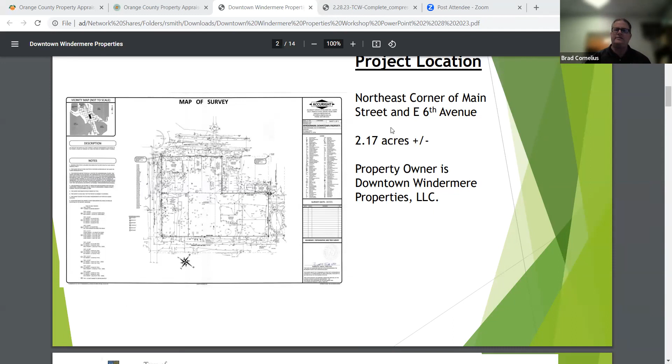Just a very quick reminder, everybody knows this is at the northeast corner of Main Street and 6th Avenue. It's about 2.17 acres, and the Downtown Windermere Properties LLC is the property owner. Next, please. So, just so everybody does remember, this is the downtown master plan, or the town center master plan that was adopted by the town several years ago, but it is still in effect. It's adopted in your comprehensive plan as well as within your land development code. And the blue circle there does show the area where this project is. And you see it is designated for development under this master plan, with the front portion along Main Street, the building zone, the rear portion along Oakdale, the parking area. So that is the master plan that guides this project moving forward. Next, please.

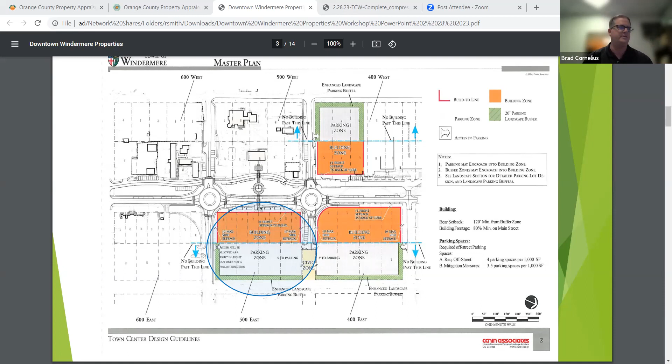So as you all may recall, at the end of the 3rd workshop, there was a request by town council for much more detailed information to be submitted for this request. Again, as a reminder, this is a workshop. We're not at the public hearings yet. So what was submitted in response to the town council's request by the applicant, CV3 and Kimley Horn, is what I have on the list and what was in your agenda packet. We have, I will call them the full civil engineering plans. They're not 100%, but they're very close to being fully completed. We have the drainage report. We have the potable water report. We have a geotechnical report.

We have an updated tree mitigation plan and a new arborist letter dated February 13th. We have more building renderings and elevations. We have a 3D rendering of the project. And then they didn't provide updated renderings of the Oakdale buffer wall or any of the buffers, the wall or the landscaping. They did submit the same rendering they had at the January workshop for the Oakdale buffer wall and landscape. So that did not change from what you saw. They did not submit though any other buffer renderings for this evening. Next, please.

So where we are right now in the process, outside of the workshops, I'll say, is because we do have the civil engineering full set submitted, we have begun what we'll call our first review on the technical side of the review. So that has begun.

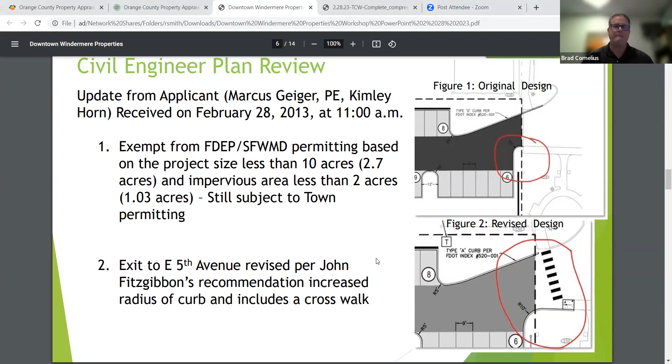So now I'm going to hit on some of the big topics and issues I know are out there about this project, just to make sure all the information needed to make a decision is clear to everyone. For this project, because it's in your town center district, which has its own set of parking regulations outside of the standard parking regulations adopted in your land development code, the set standard is 4 spaces per 1,000 gross square feet for all land use types. So there's not a differential between land use types. It's 4 spaces per 1,000 gross square feet.

So currently the proposed building is at 19,575 gross square feet, or the project is, and that would equate to 79 parking spaces based on that standard. There is a second provision in the land development code and in your town center standards that also provides the opportunity for the town council to consider reducing that requirement from 4 to 3.5 spaces per 1,000 gross square feet

for all land uses. And that determination that the Development Review Board and the town council would need to make is that this is appropriate based on the protection of existing mature trees on the site. So it's related to protection of the existing tree canopy. So with that calculation of 3.5 per 1,000, that then comes to 69 spaces under your codes.

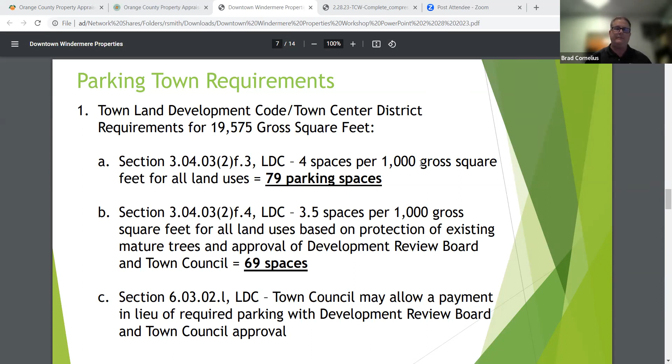What they're proposing, and this hasn't changed from what you saw last month, on their current site plan, they are proposing 69 parking spaces. So they do meet the requirement of 3.5 spaces per 1,000 square feet. So that is how they've established their parking, and that's what they're asking for the town council to approve.

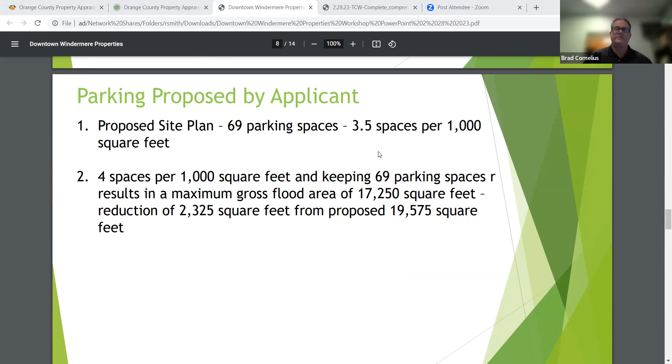Just as information, if the standard is maintained at 4 spaces per 1,000 square feet and keeping the existing 69 proposed parking spaces, that then results in a maximum allowed gross floor area, I apologize for those typos in there, of 17,250 square feet. So it's a reduction of about 2,300 square feet from where they are today. So if the 4 is maintained as a requirement and they maintain the 69, that would be the reduction required to be consistent with that standard. Next, please.

The next item I'm going to touch on, but I am going to leave this to the applicant to give a lot more detail to this. What's in your packet? You have that tree mitigation plan. You have an accounting of the trees being removed and being preserved on the site. And you also have a letter from the arborist, Eric Hoyer, that provides more information about the different tree items and topics that have come up over the last few months in these hearings. And I will not address those specifically because those are beyond my expertise, and allow the applicant and their arborist to address that.

But when I look at it and do the accounting, what it appears is that they are removing 25 native trees from the property. They are removing 27. Well, when I say property, it does include areas within the right-of-way that are impacted by the required right turn lane, or maybe in the area of the wall and the buffer area that they're putting. So there's 25 native being removed, 27 invasive, and then

of the trees remaining, 38 trees are remaining. Of that 38, 17 of them are actually within the boundaries of the project, so within the property lines. However, the other trees are around the perimeter of the property. But those are the trees that are remaining. And again, there's more information in the arborist letter, and I'll allow the arborists to address those concerns at their time. Next, please.

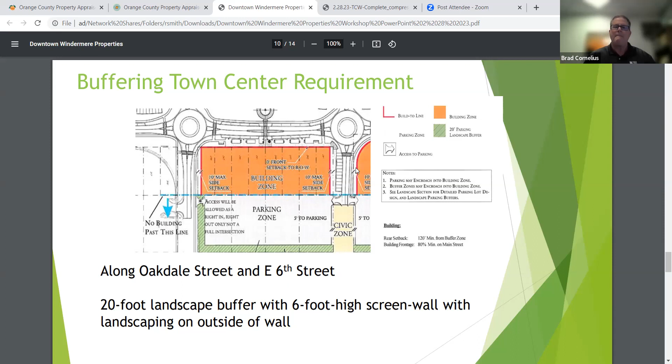This is their landscaping plan that you have with your agenda item, which does show the buffer area. They are providing the required 20-foot buffer, and that hasn't really been an issue with these last couple plans that we've had. So they do meet that requirement. They do show the 6-foot wall along Oakdale. However, these plans do still show a 3-foot wall on 6th Avenue.

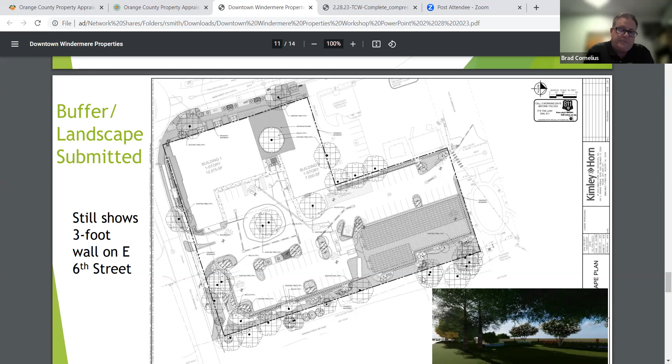As I stated just previously, your town center guidelines do require the 6-foot wall on East 6th Avenue, and speaking with residents on that side of Oakdale across from 6th, I do know they want that 6-foot wall to be maintained along 6th Avenue.

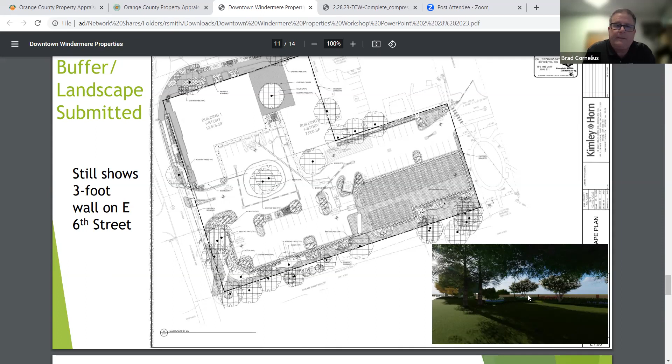So I did want to have that. The little image that's there at the corner that Robert was pointing to, that was the rendering that they submitted in their January public workshop for the view from Oakdale looking south into the property. And that's what they had provided. But we do have the plan, and actually in the full plan set, it does have a listing of all the different plant materials that would go into that buffer area. So that is the buffer. Next, please.

The other issue I wanted to touch on with everybody, which has been quite a bit of discussion, is the proximity of the building at the corner of Main and 6th to the roadway. Another point in your town center design requirements, it has what's called a build-to line, which is a different way to look at setbacks. And basically the build-to line says this is where you have to put the building. You have to build it to that line to bring it up to the sidewalk, to maintain that storefront along Main Street and maintain that atmosphere. So that's why this building is pushed where it is, to be consistent with that requirement of your master plan.

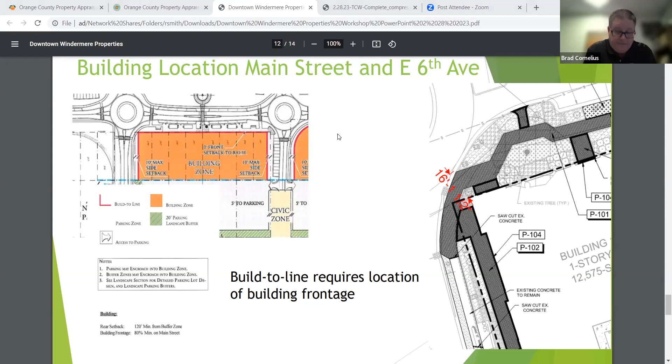I did look at the distance again, as we discussed at your last workshop, and when I measured it more closely this time, the corner of the building to what I would call the travel way, not the right of way, but the travel way of the roundabout that's in that proximity, would be about 16 feet, 16 and a half feet. So it's not right on top. Again, I'll let the applicant's engineer address site issues and things of that nature, but that is the location. I will say it is consistent though with the intent that you show in your master plan, and it's also consistent with a downtown atmosphere where you have low speed traffic and things like that. So that is some more information about the location of the building, just so that is out there for everybody's information. Next, please, Robert.

So those are the big items. So the next important part to explain, so again everybody understands the process, is we're at the 4th workshop. If, and I will say if, this is the last town council workshop, what would happen next? What would happen next is town staff would go through the full technical review of the 100% engineering plans for construction. So we would do the full technical review of the plans. And at the same time, this also requires the preparation of a development agreement. As y'all may recall, there's an agreement related to transportation mitigation, dealing with utilities, a few. So those agreements will also be drafted within that period.

Once the review is complete, once all the agreements are complete from the staff side, then public hearings will begin. And the first step will be the noticing of these public hearings. So this will be noticed when they're ready to go to the public hearings, to both the Development Review Board and the Town Council. The noticing will include letters to properties within 500 feet of the boundary of this project. There will be a sign posted on the property. The town, of course, will have it posted on the website, and there will also be a newspaper ad. So we will do our best to get as much notice out there. But as always, never hesitate to reach out to myself if you ever have a question about where this is in the process. And I'm more than happy to speak with anyone. So that would be the next step.

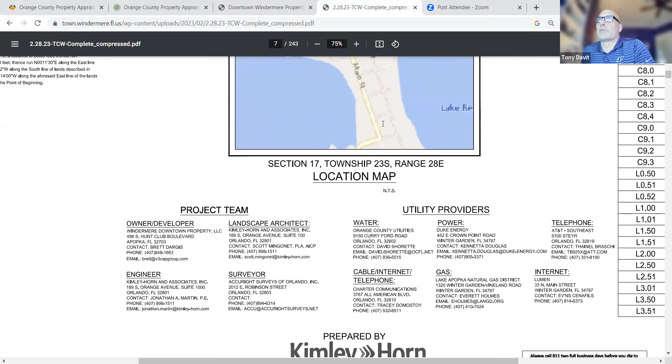Just a couple quick questions, Brad. The parking is following the standard 9-foot parking space designation? It does meet the minimum requirement within your code for the size of the parking spaces, yes, sir. Okay, and the handicap space does meet the minimum 12-foot width requirement? Yes, sir. And then the loading area, it can't be a dual use area, parking and loading. It has to be a designated loading area. Right, and they have a designated loading area within their project. The reason I ask is because you could get 8 to 10 additional parking spots there and bring that overall amount up if it was a dual use area. Right. Okay, that's all I had. Thank you, Brad. Thank you, sir.

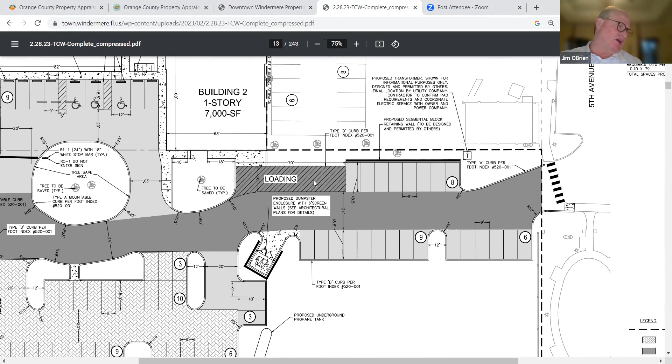Brad, can you address in a little bit more detail the truck egress? It follows the same pattern as was in last month's presentation, but we have increased the radius as the truck leaves, correct? Is that accurate? Right. And Robert's showing the page there, and I will let the engineer give more detail on it.

But from the non-engineer, the change that they made, and why I missed it because I looked on the other side, was here on this east side of the exit coming out onto 5th. And so the change was this curb used to come more out this way, more out into that travel way. And what they did is they changed the radius, or the way that curb comes around, which drew it back, which gave more room for a truck to exit out, swinging out this way and around. So that was the change that they did.

And that was something at your last workshop that Mr. Fitzgibbons had brought up as an idea to help address the movement of truck traffic out of the project onto 5th Avenue. And what they also added that they didn't have before, they also included a crosswalk here across that driveway as well. So that's what was the change. So they didn't change anything in terms of the right of way on 5th Avenue once you come out of what I'll call the throat of the driveway there. Nothing changes out there. The change happens back here where it connects.

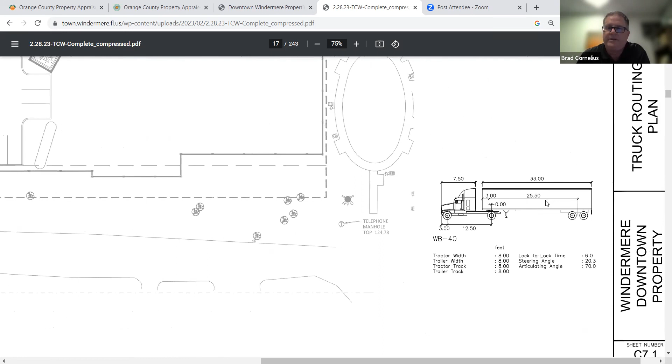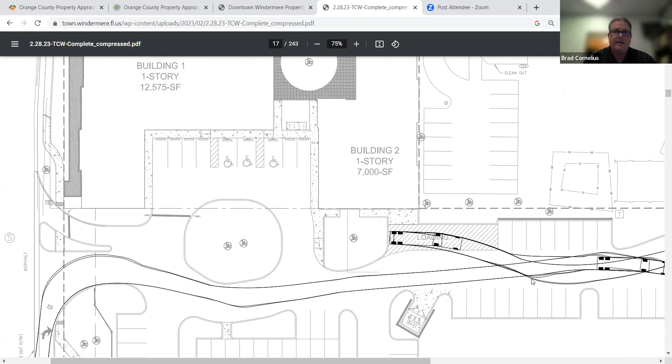They did model this at a large tractor trailer sized truck. It's not a small truck that is modeled here. So that is what I would call the worst case scenario in terms of the truck sizes that could potentially come through. And we did get the verification from the fire review that Chief Sorensen was not concerned with the ability of his fire trucks to access and leave the site as proposed.

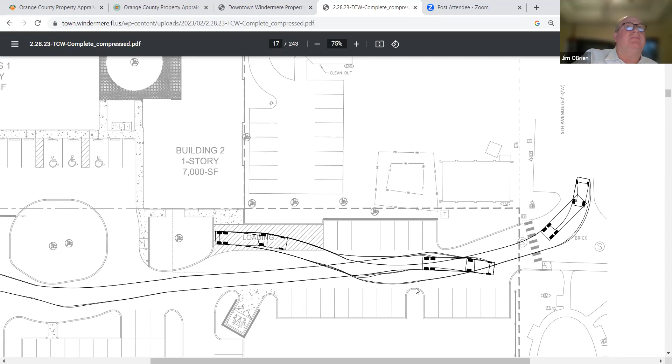Thank you, sir. Yes, sir. Mandy, did I see you with your hand up? I did, but you asked my question, so I'm good. Oh, wow. Stole it. Sorry about that.

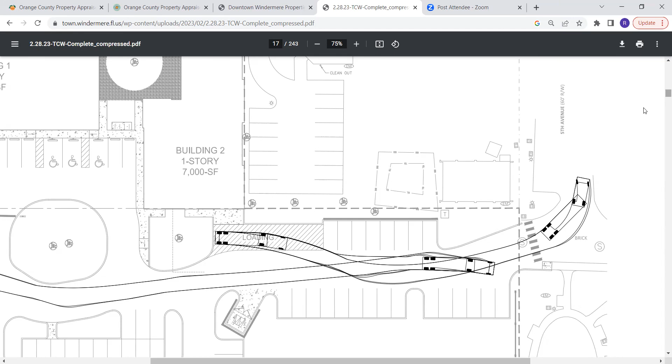So what I wanted to do, I know this project has been discussed extensively. There's a lot of base knowledge about it. So I thought I'd pause for a minute and take a step back from where this started and how we got here, to shed some light for those that aren't aware, and also let you know on our team side with V3 Capital, we have Brett Dargis on the line and Keith Silverman, and myself, and we also have our arborist on the call as well, Eric, our architect Raheem, and our engineer Marcus, which I know you guys have heard from in the past, but I did want you to know that they're on and available for questions. So we hope we can convey whatever information's left for us to move to DRB.

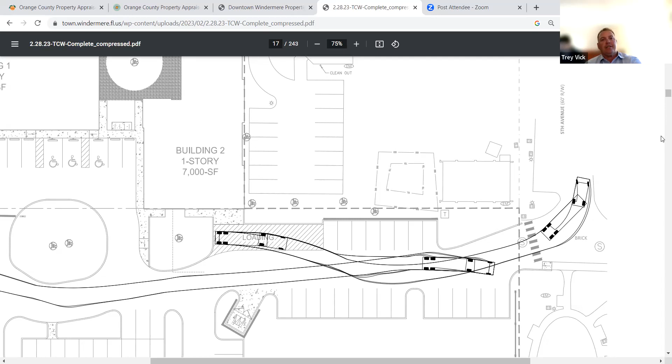So to just provide a 5-minute pass on this project, we got involved in early 22, January of 22, but the project dates from significantly farther back. Our partners, Jim Gissy and Jim Carr, lifetime or nearly lifetime residents of Windermere, are the owners of this project, and their families bought it over 10 years ago, and actually started this PUD process back in April of 2019, where they began pre-apping and talking about what this project could look like into the future.

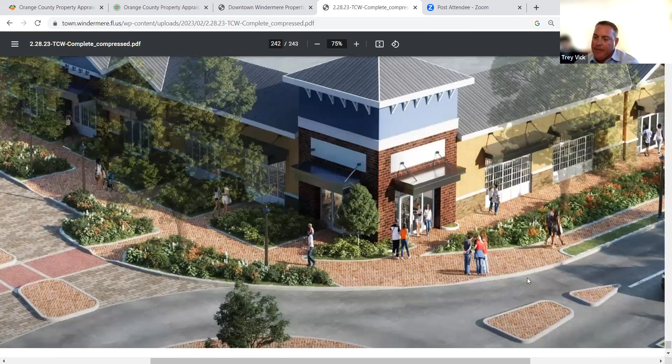And then in June of 21, so fast forward about 2 years and 2 months through a lot of public comment, a lot of workshops on their behalf, a lot of work with town staff and council members, they did get an ordinance passed, which is the PUD that we're talking about today, and we're doing this workshop, which was a requirement within the PUD, in hopes of establishing a rule book or a playbook, so to speak, for how this project could be developed in the future.

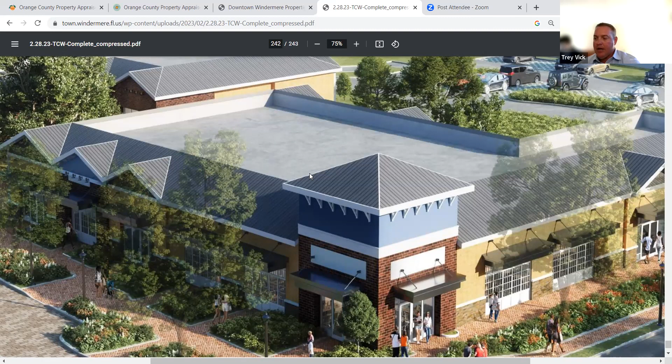Still requiring approvals from town council, which Brad laid out, and which we're more than happy to proceed through. Our involvement came, like I said, in 2022, predominantly focused on our desire to help Jim Carr and Jim Gissy get this project built. We've known them a long time, and our background in development and experience with them and other projects like this made sense.

I know you've heard mostly from Brett Dargis on our team. I'm the CEO of V3, and I just wanted to personally talk through this. So to hit Brad's points, the biggest challenges I think we have on this site: trees, obviously, making sure that the development maintains the integrity of as many trees as possible. The parking has been a hot button, which we can talk through. Access, also a hot button, and buffering.

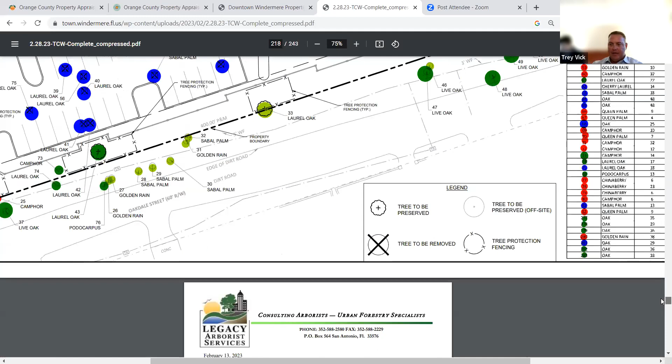So if I just start on the tree side, because I would say that's probably in the PUD and in our meetings been a big point. We've spent a lot of time, specifically Brett and Keith on our team, with the tree board and through these workshops and our arborists, through physical walkthroughs on site, and everything that we can do to collaborate to save as many trees as possible. There's a lot of beautiful trees on that piece.

I think when it originally went through in 2021, when that PUD was approved, the original thought was maximized density, save trees in the right of way. And so the removal of trees was substantial. But through this collaboration over the course of the last, I'd say, 3 years, we've gotten it to where we're saving 38 trees. One really great tree that we've basically built these buildings around, which is in the courtyard, will provide a nice tree canopy in that area, as well as a main tree along Main Street.

And then you'll notice the round circle in our parking field, which is a stand of two large trees that we're actually going to have as an area that people could sit under. It's unpaved and available for folks. So I think that's a big step and a big improvement that has come through collaboration.

When we talk about trees, back in October through one of our workshops, an email was sent out by the tree board with 16 points. And these 16 points were the recommendations of what the tree board would need to see or want to see to put a recommendation to proceed. And so of the 16, we were able to accommodate 14 of them. One of them Brad actually referenced today, which was the buffering setback area, which is actually per code. And so unfortunately, it was a request to expand that buffer area. We don't have control over code, so that was not something that we could change.

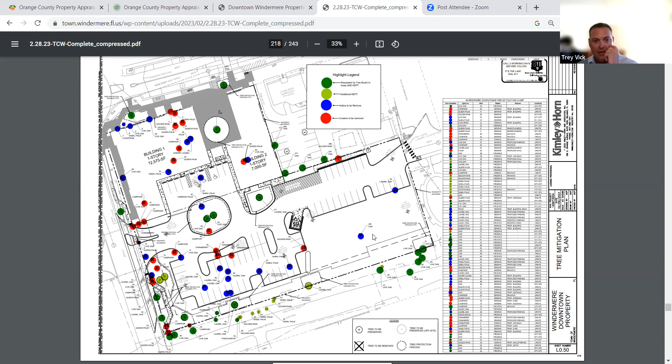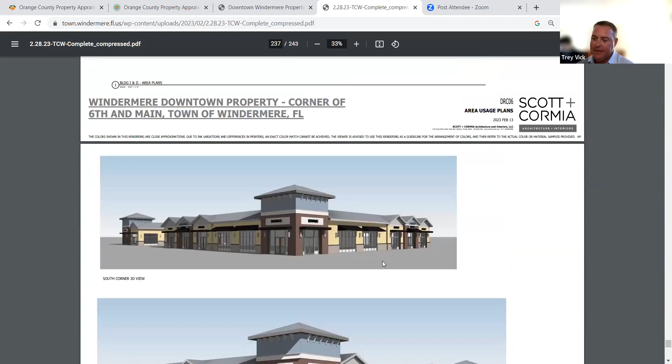We're next to a 2-story building, as you can see in a rendering that we had prepared with an adjacent building. But we just felt the character of that felt good for what we're trying to build at 6th and Main in Windermere. Doing that and saving these 38 trees has reduced our parking to 69 parking spaces, as Brad mentioned, just over 3.5. If you look at that original PUD that was approved, I think it was known all along that getting to 4 per thousand with a focus on being conscious of the tree canopies was going to be a large challenge. And that PUD provides the opportunity to be less than 4 per thousand.

And then it creates a space for, I'll call it a fee for parking, so to speak, of public parking spaces around that's to be set in the future. So that's a concept that I don't think we created new in this conversation. I think we're just trying to get everybody comfortable and on the same page. But that was a concept that's been around since this was approved in '21.

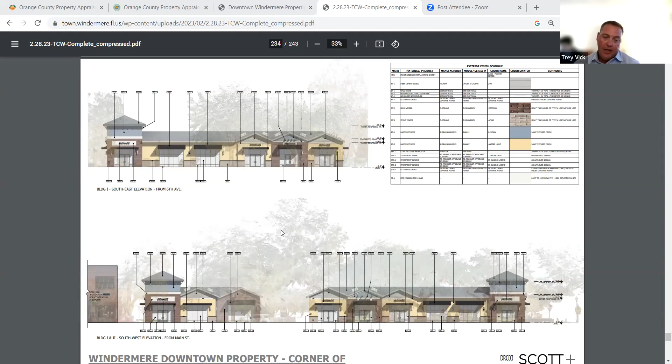And we believe, personally, with the uses that we're talking about, we do have a boutique Ace Hardware that's going in there that was mentioned in that 7,000-foot building, and have a lot of really nice interest from existing tenants that are there, as well as several new tenants that will be coming in. We feel comfortable, and the tenants feel comfortable on the parking side, that it's practical and usable and will operate well.

And so to the extent we could create more parking, we believe it would impact the trees. And I don't think that would serve the interest of the tree board and the town of what they were trying to accomplish. So we'll have more dialogue on that, I'm sure, but I just want to point that piece of it out. The access, and kind of to the point of comments that come out of these workshops, Mr. Fitzgibbons had the comment on access, we were able to adjust that. And that was a good comment. I think that freed up some access and allowed trucks to get in and out better.

Buffering is probably the next one that I heard us talk about. On the wall size, I know that's been a point of contention. And I want to be on record to say, we will build a wall that's 6 feet tall, 3 feet tall, 4 feet tall, whatever makes the most sense for the project and for what council would like to see done. Personally, I think a little shorter wall might aesthetically be a little more pleasing to the project, but I understand the concerns about headlights and things.

So if that makes it a 6-foot wall, I want to be here to tell you we're going to build that, and that's what code says. So we're not trying to pull a fast one by showing a 3-foot wall rendering. We're just trying to show you guys what it could look like, and we do have a long road of public approvals that are going to come even once these workshops are concluded.

So I think the last thing I'd say is today is not the final conversation. Today is kind of the final workshop for us to be able to then move into the public comment and voting on what this will or will not be. I mean, our goal is to build a great project for the town. Our goal is also to be a good steward of the partnership that owns this land and their resources that they've invested in this. And I think that they deserve an opportunity to know by a public vote what they can and can't do according to the town of Windermere. And that's what we're here to do.

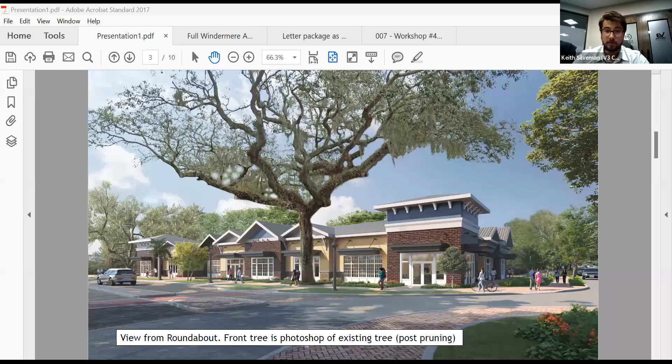There's some good pictures in there. I did work on getting an illustration of a 3-foot and a 6-foot wall sort of next to each other so that the town council and the public can see the difference and see what they kind of like. I know there's been discourse on that. So I do have a rendering on that. All right, you ready to go? Go ahead and share them if you want. I can just talk through it real quick. So this is probably the best way to see it. Yeah, and so this is exactly what I was just mentioning on an opportunity to do a 3-foot or 6-foot wall or somewhere in between.

For those of you that are on the phone or have done renderings before, renderings are just that. It's a rendering. It's somewhat of an inexact science. And frankly, you guys would never let us build to a rendering. You're going to make us build to the plans that you approve and permit. So when we're doing these, just to address it, our goal is to provide the closest illustration possible.

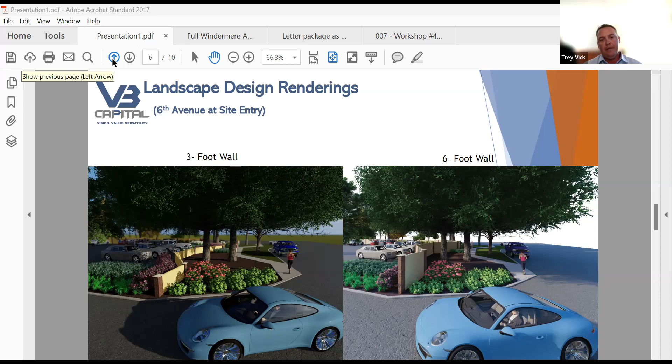Given the nature of a rendering, it is not possible to render something to the exact finite detail of how it will be constructed. And especially when you talk about backgrounds and things like that, our goal here is to focus attention on the points we're trying to illustrate. It's next to impossible to overlay an entire cityscape onto a rendering. So I know there's been some commentary on that. I just want to address it because I don't want people to feel like we're hiding a piece of this rendering that they would want to see on it.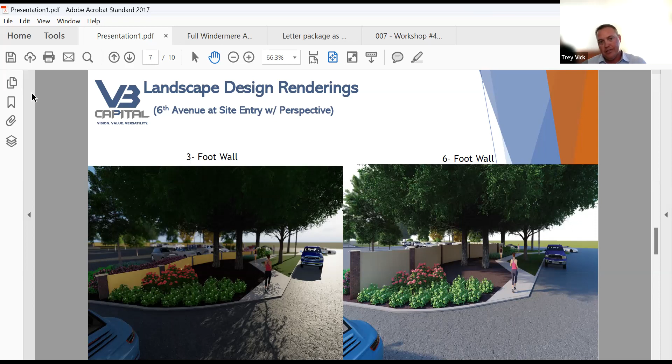But when we build these, it's a time-consuming process our architects go through, but also it's to illustrate that point. So this is that 3-foot, 6-foot wall comparison that we're trying to show as some options. And again, I don't think today we're going to make that decision. It'll be through comments and DRB, but I want to be again on record to tell you that we're on board to build what the town wills. So I don't think it'll be a point of contention, but again, just an illustration.

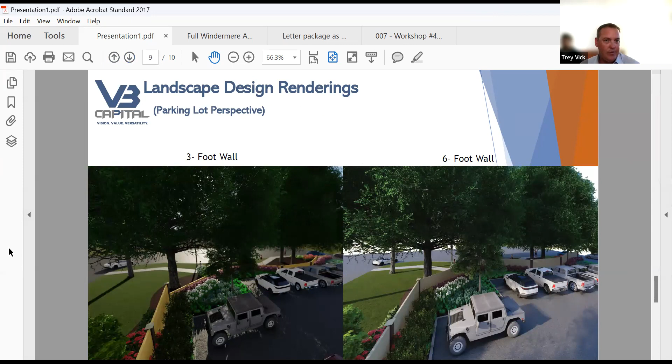You did see the rendering that I think we provided in that presentation of the side-by-side building. That was the cover page there. And so that gives you a little bit of an idea of size and scope, which, obviously, we're a little bit smaller building height than our neighbor.

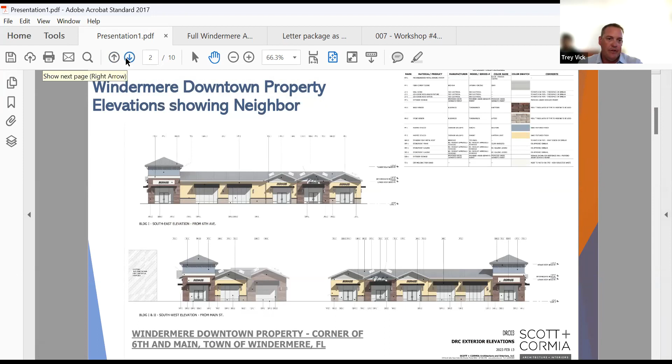And then Keith, anything else that was in that slideshow that we wanted to make sure we go through? I know you have a few others in there, but I think a lot of them were shown by the presentation that was put out. So I think that's probably the extent of what in that PDF would be relevant to this conversation. Yes, sir. I agree.

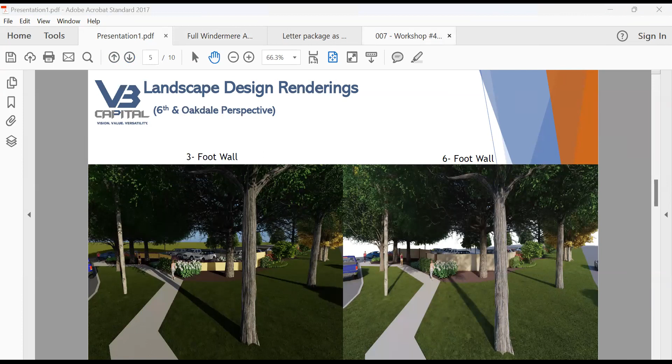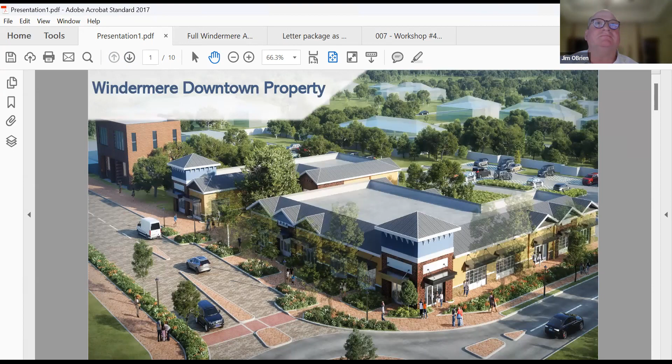All right, Mayor, I guess they're opening the floor up to town council questions. Yeah, so if there's no additional information from the applicant at this time, we will allow council to have Q&A with the applicant. Mandy?

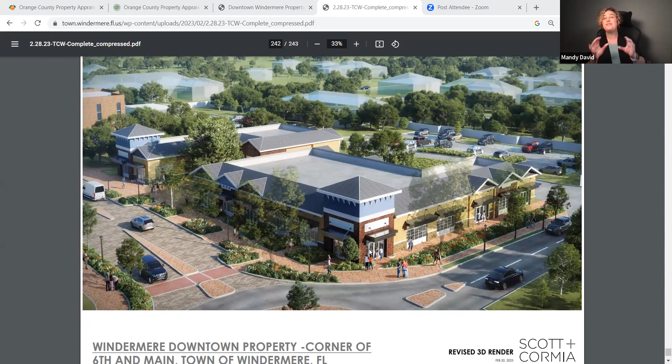Thank you, Mayor. Okay, so I understand about the rendering. Because looking at the building, it's not the feel of Windermere. So you're saying this is just an idea of what it's going to look like, but for the sake of the town, it will match the look and the vintage type of Windermere. Is that correct? Am I hearing that correctly?

Yeah. So there's an approval process for our building plans that we have to go through, and that's certainly going to be followed. I mean, we haven't even done our final building plans yet. You've got pretty much final civils, so drainage and parking and site work stuff. But from a full building, yes, that's not completed yet. But this is representative of the style that we're working towards. With this is Brett Dargis. We've been given design standards for architecture that we'll be following quite closely.

So, Mandy, did you get your question answered? I want to make sure. Thank you, sir. And I appreciate that. So I'll follow through on that as well. And I know with the design standards, there are certain elements. I was just saying design standards can be good and bad, right? They can save you from something hideous, but sometimes they get in the way of amazing, right?

So I think some of the feedback that I've heard is that we would definitely like to see if we could utilize some more of those design standards in terms of the facades and different looks that can be built into this. I'm not an architect, I don't want to see us use every one, but maybe if we could break it up a little bit and make it just a little bit more interesting as well. I do think potentially within those guidelines and standards, hopefully there's some options for that.

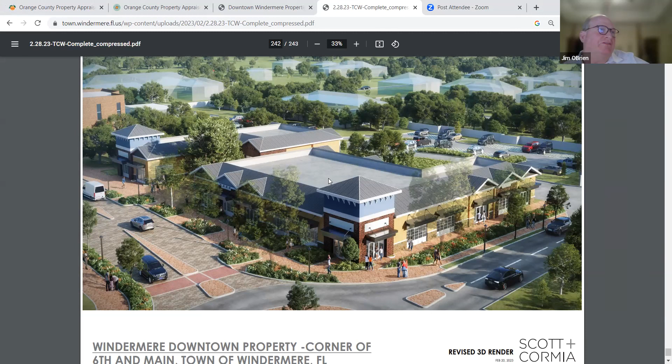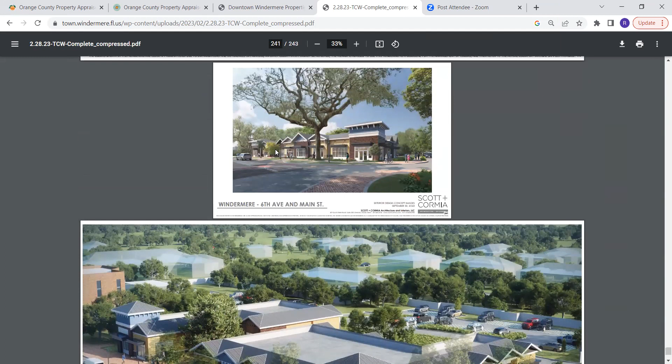So yeah, and listen, I'm not trying to raise alarm bells. I was just saying that, first of all, we want to make sure that we all understand where we are at in the process. And then also, maybe you guys did say that you lowered the corner. It does look lower to me now that you say that. But that is good to know, because we did, Mayor. We had a 36-foot maximum, I believe, at the time. It's in the design standards, and we've lowered it quite substantially to bring the scale back down to the city size. Okay, and that could be seen because the Ace Hardware building also had the tall tower on the north side that was a little more akin to the architecture building next door, which is now not. So, and with maybe some tweaks to the colors.

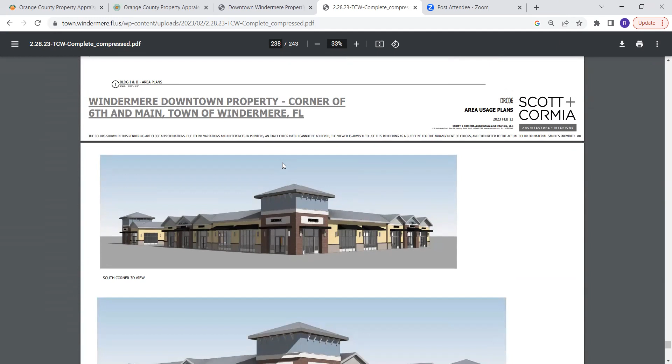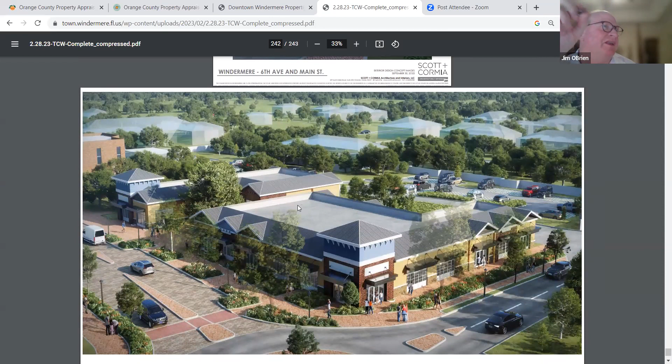The architect, Scott Cormia's office, was handed the standards at the very beginning of this project. So he's endeavored to make sure that, as a matter of fact, we changed it quite a bit from the first to second workshop, because there were some comments about it not matching the style quite to the extent that we needed to. So now we can still play around with some colors and things like that. But can you stop it right? Okay, I'm sorry, I did not mean to interrupt you, but you were scrolling. So if you could just stop right there. No, that's it right there. Okay, so if you look, right where your cursor is.

Now, see, this is an example of, and I know this is an imperfect process, right? So that's the beauty of having the opportunity to talk about this. When you look at that elevation there, that has a lot more character than some of the other drawings. So that's key, and I just want to make sure we don't lose this, because you'll see the roof lines are different heights. The buildings are offset there, if I'm not mistaken. I'm looking at what I believe are some front elevation shifts. Yes. Okay. There's relief. Yes. So those are the things that I want to make sure that we're showing residents so they can get a better feel, because I think what happens is when we look at some of these, and I know that you're showing a different aspect in each drawing. Like, for example, the one below is to show the reference to other buildings that surround it.

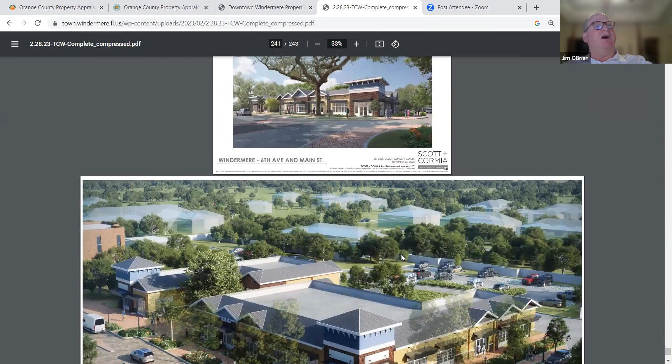But you can see that in this particular drawing or rendering, you don't see any of that relief. You don't see all of those roof lines; they look repeated. And I think that is where people were kind of saying, like, I know we gave them design guidelines, but it looks a bit monotonous.

So we just want to take those opportunities, and also just to confirm with you, we want to make sure, which one is it? Is it the one above it? Because I think people will like that more. I think to your question, that probably is the correct elevation, because we're required to have that relief in those 20-foot increments, and that shows it the best.

The sky view, the view on the next photo was really generated to show scale with the building next door to us. Totally understand. Yep. And I think everyone understands that. It's just a matter of when we're doing this, if we can point those differences out, it's helpful. And we get better with this as we do more, but also that I think is just super important.

I want to thank Robert for the clarification. I want to thank Bill for his patience. Councilperson Martini, you're up next. And I also saw Councilperson David. I think she just wanted to say thank you for pointing that out. So, all right, good. Yes, thank you for pointing that out and clarifying that. And thank you all for your time and efforts on this project.

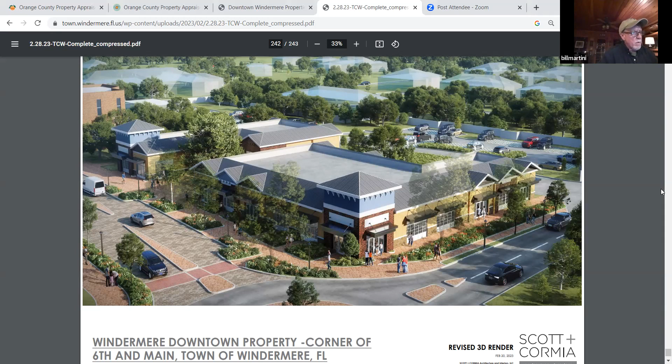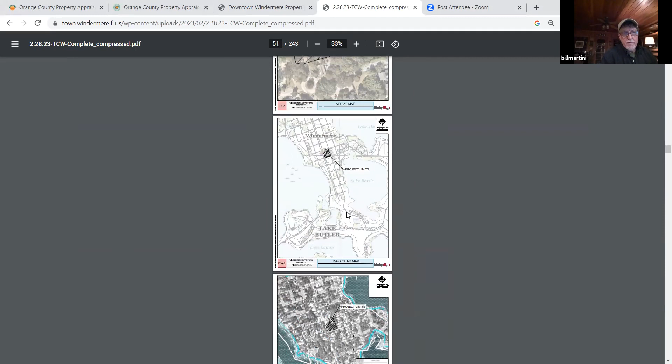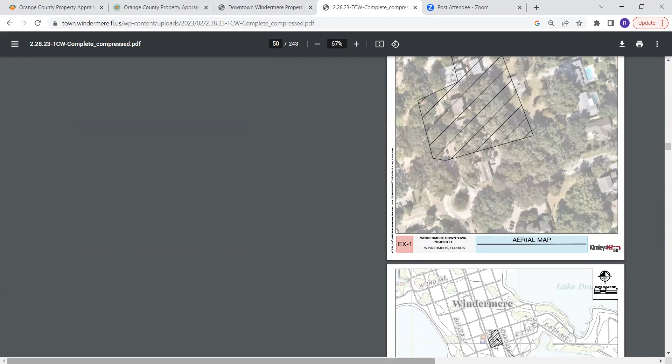And one last point, on page 51, this shows the town. It appears that the project limits are on the wrong block. Page 50 is incorrect also. Page 50. Okay, and we can take a look at it and fix that. So if you could move that project one block north. Yep, I see. Not that one, the next page. Well, that one too, but the next page down.

So those folks are going to be surprised when they get a shopping center in their backyard. Yeah. Oops. Absolutely. We'll fix that. All right. Thank you. I appreciate it. Thank you very much. Thank you, Councilperson Eagle Eye there. Very good, Martini. All right. I had to find something, sorry. Hey, we look until it hurts.

I know that I see a couple of folks from the residents. I promise you we will get to the opportunity for all residents to have their input just shortly here. We just want to make sure we go through a couple of these things so I can get council all their information and have them have the opportunity to ask some of the questions that have also been submitted via resident input as well.

Dorothy, I see you there. Dorothy's our town clerk. Dorothy, I know you're going to read a letter, I believe, but do you have something else as well at this point? No, just the letter when you're ready. Okay, I don't see any additional town council input. So Dorothy has a letter that has been sent to us by Councilperson Rose, who was unable to attend this evening.

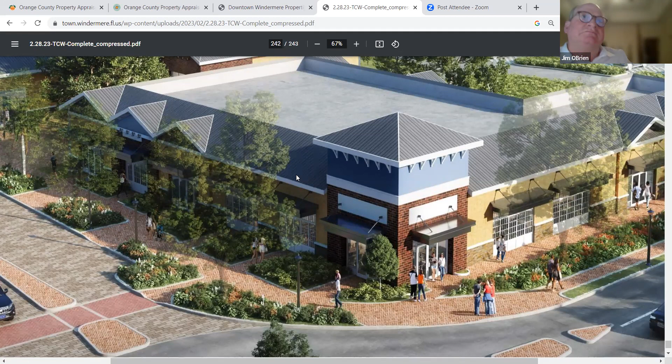Okay, regarding 500 block PUD, I am unable to attend the February 28th, 2023 workshop for the 500 block PUD design review. So I'd like this note read into the meeting minutes. I have been reviewing the 500 block development plans and scope of work for many years while serving on the DRB, LRP, and as a council member. At each of these reviews, I have stated my position that I will not approve a plan that provides less than 4 parking spaces per 1,000 square feet of development. Yet as of last submittal dated February 8th, 2023, I see the developer is still trying to convince the town that 3.52 spaces per 1,000 should be adequate.

For those that are not familiar with typical parking requirements in Orange County, Florida, let me point out that typically: Number 1, restaurants, 1 space for each 4 seats provided for patron use, plus 1 space for each 75 square feet of floor area provided for patron use, which does not contain seats. Number 2, retail, 1 space for each 300 square feet of gross floor area. Number 3, business office, 1 space for each 200 square feet of floor area used for office purposes. Number 4, medical office, 1 space for each employee plus 2 spaces for each employee for their patient use. Note that if not enough parking is provided, the burden is placed on public space and other businesses to handle the overflow. This is not fair to anyone.

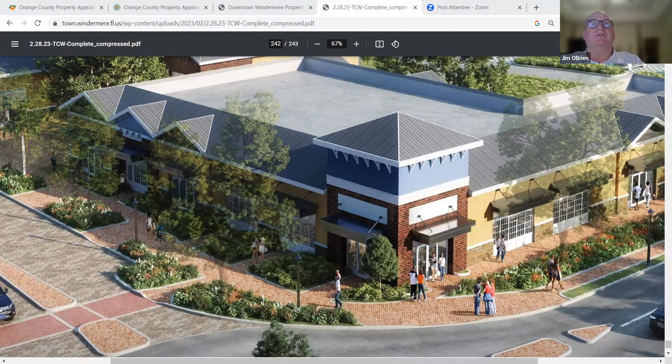Stephen, go ahead, sir. Stephen Withers, 712 Main Street. After the January meeting, I sent a letter to Dorothy, and she said she couldn't add it to the minutes, but it had about 10 points that I think are still valid. Did anybody get that email? First question. I believe we did, sir. Okay, good, because most of my points are still valid, I think, in a sense.

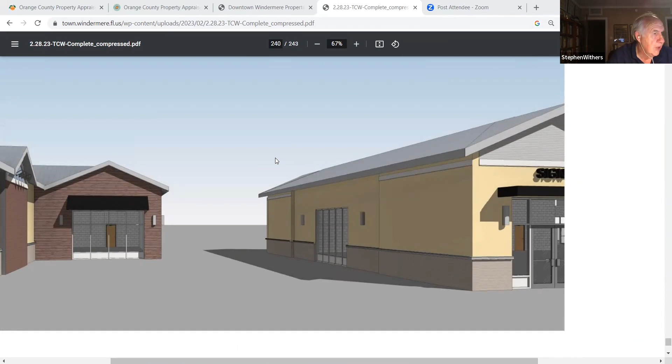My concern is that most people will be approaching this project from the parking lot, and the back facades of these buildings look like the back of a shopping center. They don't look like that's the main approach. One of the comments I made was certainly you could break that wall up with change in color. Or siding. I think siding would be cheaper than stucco, like the siding we use in the town hall.

The other comment, if you go back to that perspective, stop right there and lower it down just slightly so I can see the top of the wall in the back. In the back, you can see a black car and a silver car right next to a green space with nothing in it. Over to the right there. That would provide 2 parking places. And I think if we planted some fig vine or something along that wall, it'll give it a lot better impression than just putting a green thing between cars.

We just need to look at every opportunity to make that parking entrance into these buildings as nice as what's trying to be done on the front side. That's my comment in addition to the ones you got earlier. Thank you, Stephen. I'm going to take a wild guess here, there's probably not just empty green space there, because I know that we would take those 2 parking spots in 2 seconds. So I'm going to guess that's not an exact rendering there for the parking.

Well, those 2 parking spaces, if they were moved just south slightly, you could save one of those big heritage trees. There may be something civilly under the ground that I don't know about, but looking at that rendering, I prefer to see some greenery along the wall than that big greenery separating cars. I totally agree. Hey, Brad, quick question. There's no low-hanging fruit like that in the parking design, is there?

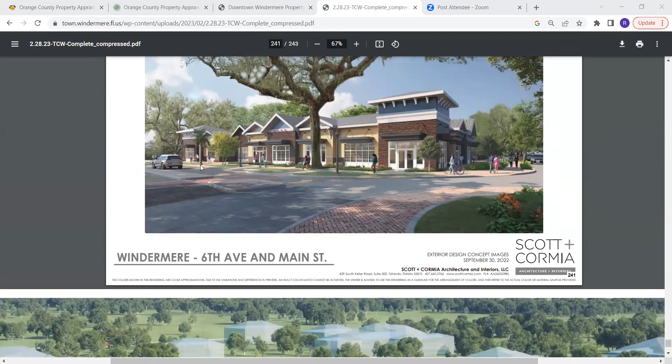It's very flat. It does look like a warehouse. There's no, what did you call it, Hannah? No staggering or variation of buildings. I work in the film industry, and if a director said, look, we need to build a Western town, or we need to keep consistent with what this town looks like, never would a production designer come up with something that looked like that.

Another thing is, we have lots of residents who like to walk up and down the street and shop, and it looks very dangerous how close we are to Main Street. We used to have benches set off to the side where a lot of our favorite elders used to sit and buy ice cream for the kids, and such great memories. I feel like driving around the corner of this side here on 6th and Main is like the sign at, what's the name of that place? Marina Bay, that gets crashed all the time. It just looks very dangerous to me.

Another thing is, and I'm sure I will let Susan address that in more detail, there is no room here for any large trees in the front that would fit any ISA standards. And I know we have an arborist on board here, and I hope that person agrees as well. One minute. Okay, I'm done. That's it. I'm hoping the next rendition looks great and we can come together with something amazing. You got a minute, Joan. Oh, I'm fine. That's fine. Everyone's saying the same thing.

Go ahead, Hannah. Yeah, my feelings are similar. I'm somebody who's traveled all over the United States and seen thousands of cities and towns for business. Oh, sorry. I'm Hannah Amar, 315 West 2nd Avenue. Thank you, Hannah. You could take this and put it in any city or town in the United States and it would fit right in. It's very generic. It looks like up the street where the Walmart is. So that's my main objection. And also the line of sight. It just looks like it sticks out so far right there at the corner of 6th and Main Street.

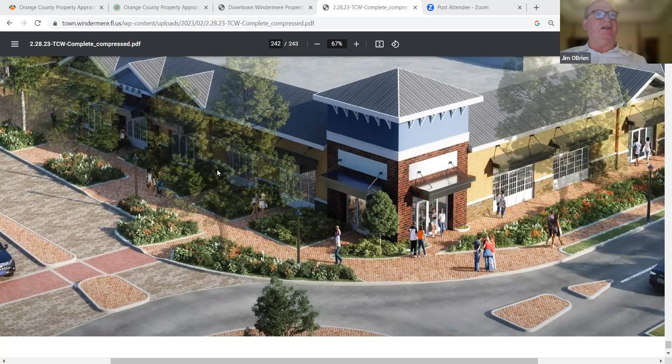I want to make sure that I do let everyone know this, that the V3 Capital Group and all the applicant folks, they did want to have an in-person meeting for this workshop. I actually asked for the virtual meeting because, quite frankly, the participation we get on the virtual meetings is 2 to 3 times what we get for an in-person meeting. And I value that input.

And we will have the opportunity to have 2 in-person hearings that will be coming up if the project moves past this stage as we discussed tonight. So there will be lots of times for in-person, but they did want to, so I want to give them credit for that. And let me know if we don't get a meeting scheduled soon, we'll make that happen. Angela Withers.

Thank you very much, Jim. I do want to thank Brad for all the effort he put into explaining how some of this has been arrived at, but particularly this concept of the build to line in the design guidelines. My concern there is that what's happened is exactly what you said, is that the designer has built to the lines rather than considering the best design.

But you've got this tall element on the corner right where it is least desirable because we're limiting that view as you come around the corner into the town. And I'm wondering if this can't still be addressed so that we're not just building to the limits instead of really getting the best possible design out of it.

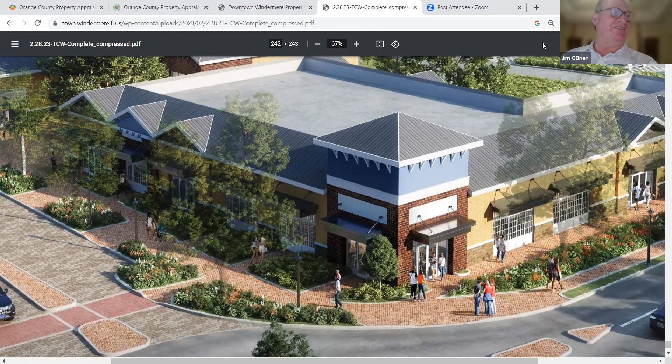Thank you for doing so. We appreciate it, and I appreciate you being iPhone 8. We'll just put you down as that. Thank you. All right. I believe Nora and then Brandy, right? Did I do that correctly? It's fine.

So Nora Brophy, 426 Magnolia Street. And I have a question about the 5th Avenue entrance and exit. Is that going to be two-way traffic going in and out on 5th, or is it just one way?

We would have to address all your questions at once. It's easier for the 3-minute time limit. So if you have questions, we can go through the line. Because my concern is that, I mean, the traffic is going to be horrendous anyway, but I think having two-way traffic on 5th is going to make it much worse.

And I agree with everyone about the strip mall. And, you know, it's going to be our town's 100th anniversary in 2025. And it would be really nice to have a building that lent itself to a 100-year-old town. That's it. Thank you. Thank you, Nora. Appreciate that. And we'll get the answer to that question as well.

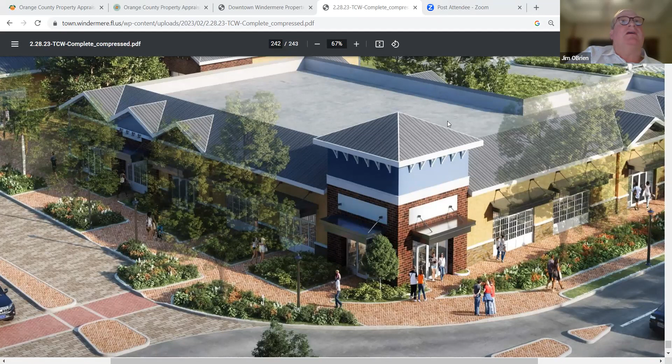Brandy's up next. Yeah. So the first thing I want to start with is that I do think that we need to hold them to the 4 parking spots per the 1,000 feet. I don't see any reason we need to be giving leniency or a waiver in that situation. I mean, even when you look at our own variance code for a resident, it actually says one of the important things not to be considered in review for a variance application is that the implementation of these regulations would pose an economic hardship on the cost of building or redevelopment project.

I cannot tell you how many variance requests have come to council or otherwise, and when they use, well, it would be cost prohibitive to do that, we strike it down. So they shouldn't get any more leniency than the average resident would get for what they want to build. Saying that there's a lot of costs involved in reducing the size of their building, that's a cost prohibitive kind of thing that they're saying. And I don't even think that should come into consideration. If our residents are expected to uphold that, they should have to too.

We've already got, based on what Molly Rose said, a very, very low limit for the amount of parking that's needed per 1,000 square feet. Our town deals with so much traffic and so much parking, and it's already a cluster. I also agree with Nora on the two-way traffic. I know there's plans for the propane tank for Ace Hardware to have there. You're going to have a propane truck coming in and having to top off their propane. That's going to be sitting there for a while. You're going to have trucks doing deliveries. And I guess it depends on the time, but two-way traffic seems like just an accident waiting to happen.

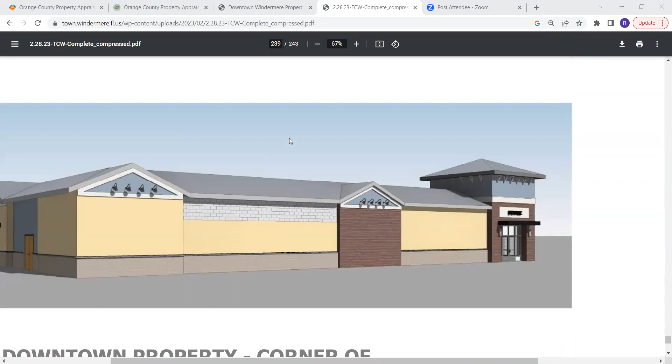And in terms of the trees, I do appreciate what they're saving. But saying we're saving trees that are on the perimeter of the right-of-way, that doesn't really count to me. Those aren't their trees to touch anyway. But I think I heard something about trees in the right-of-way being taken down, and I just don't remember that, so maybe I misunderstood that at tonight's meeting. So that's basically it, other than I just stress that the council hold them to that 4 parking spots, and answer the question about the height.

Thank you, Brandy. Appreciate that. Susan, you have your hand up? Mayor, this is the Susan, I think, that proposed the question in the chat box. So I would probably request 2 minutes just to be fair.

Yes, I do. The lady's suggestion about recessing that corner is really good. I'm not an architect, but I was looking at the front of our town hall, and if we replicated something like that on that corner, that would begin to bring the history into it. But that was seriously a question for the architect, because town hall was built in 1924. While the police department may not be a 1924 building, at least it's not something that sticks out

as being very different. So my question is, what pieces of these buildings that we're looking at in the renderings are actually looking historical and trying to complement us? Because I continue to hear people talk about the architecture. So could one of the architects please address what their thoughts are?

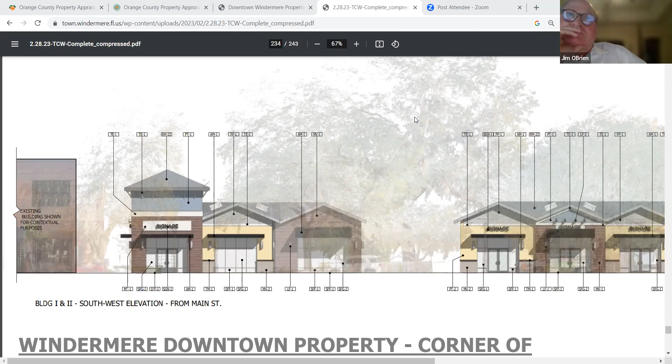You're correct, Mayor. The town facilities are not within this district, but I do want to say in the preliminary development plan process that this project did go through, the applicants at that time did represent they would use the new town facilities to help guide them in the design of their buildings. So that is part of the record of that approval. Thank you, Brad. I did not recall that.

I appreciate everybody with all the input. That gives us a lot of fodder for conversation. Obviously the feedback is there. I think we have 1 or 2 more folks who do want to comment. Can Brad clarify on that? Were you saying that the most recent facilities that we built, they were going to be using that to incorporate their design? Go ahead, Brad.

Thank you. Yeah, correct. The new town facilities were to be used to, I would say, inform, not that it would copy it, but it would be compliant and consistent with that, as well as the brewery building. Those both were pointed out and part of the record for that approval. And the brewery, Brad, does utilize the downtown master plan design guidelines, yes? That is correct. They did design that consistent with the guidelines. Good.

I want to clarify all of those points so everyone is on the same page and understands what is and what isn't. We don't have a primer right now, but if you go on to the town website, you can find all of the downtown master plan guidelines, and it's probably an interesting read for a lot of people making comment on the design, because some of this is the architect, and some of this could be our design standard guidelines as well. So I want to make sure we appreciate that.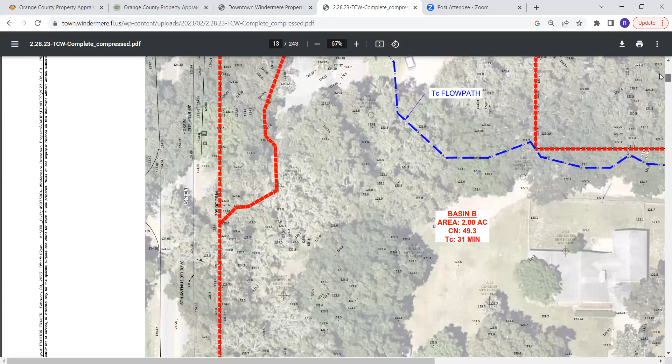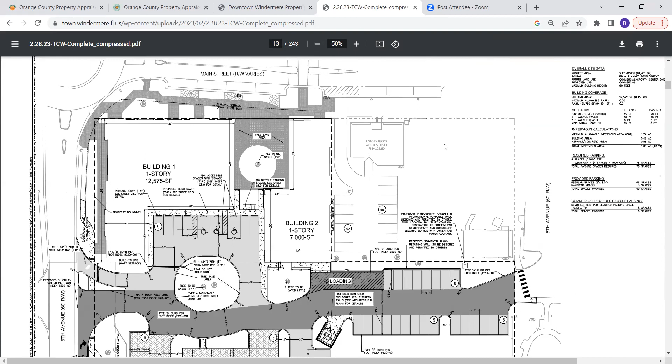Okay. Trey, I think you were in the middle of an answer. Just going to address the 5th Avenue. It is 2-way, and I believe it is 2-way now. And we don't actually own all the way to the corner, so that would be a change to a lot of other folks' real estate than just ours. The other thing on the building height is our building height's 26 feet. Originally we were pushing to the max, 32 feet or wherever, but we did drop it down to 26 feet just to address it. That made us shorter than the 2-story square brick building we're next to. Next door, right? Okay.

All right. And Mayor, what I'm showing here is the properties that are not owned by the developer. Correct. And that is another piece to this. The part that is adjacent to Oakdale is owned by this property owner that we're speaking about tonight. And then there are, I believe, 1 or 2, or maybe 3 property owners for the other corner there where Robert's moving his cursor, and over to the 2-story, what we affectionately call the Margaritaville building. So just for scale and scope for everyone.

All right, so I think we've gotten most of the questions answered. So with that, I'm going to close public comment, and we've disabled the chat box as well. That's just so we don't get a back and forth where people are typing in answers that may not be the correct answer. We want to make sure that we do everything in the sunshine and that we have all the opportunities to make sure we have the correct answers.

At this point, I'm going to open it back up to Town Council for discussion on any of their final thoughts, and where they sit in terms of, so the applicant can go to DRB at any time, but certainly if council feels that it's appropriate to send them there. The other thing I did not hear, and this is part of the next stage, but are we or are we not in sync with the tree board and the current plan that we have? I know the plan's an improvement from what we had previously, but for my purposes, I'd like to know if we're synced up there, and if everything is where folks feel it's the best it can possibly be.

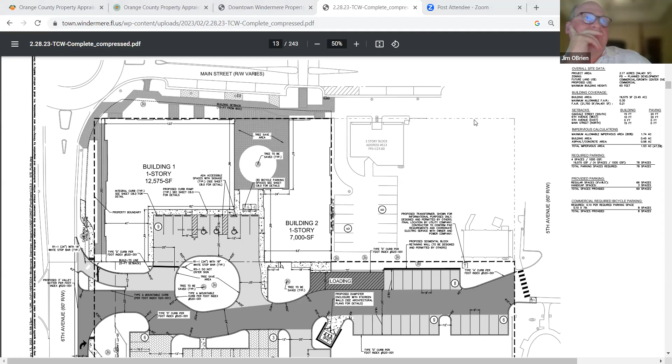In addition, I think the proximity to 6th Avenue and Main Street at that corner is a concern. I think we need to address that and pull that back. That will also allow us for potential upgrades to the circle when that happens. And then the roof lights, I do agree, those look like castle turrets. That's not exactly the look we're going for in downtown Windermere. So, those are the 3 big items that I think we need to address prior to the applicant going forward to DRB.

Thank you, Councilperson Davitt. Councilperson David. Thank you, Mayor. And I'm going to piggyback on Councilperson Davitt's comments because they're in line with mine. That was why I asked the question about can we change the facade of the building, because if we have to stick within the parameters that go to DRB, then I have a problem with how this looks. If it looks a little more like the other one, it looks a little more the look and feel of the town, but it's still not quite there. So that's why I was asking about the facade.

Second of all, the parking. Trying to get downtown, even for my classes on Friday, I park in the admin building because of farmers market, which I love, there's no parking. I can't park to even enjoy farmers market before class. I have to park in admin. So I just think that we should hold them to the 4 spaces. I think there's some low hanging fruit. If we can find some extra parking where we can at least allow maybe some golf cart parking, that maybe one car could fit there if there isn't golf carts, something to where we can have more parking because we need more parking. And so those are my 2 main things.

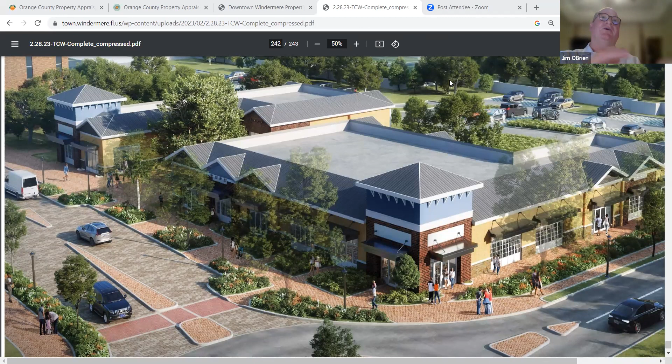But am I wrong to say though that the developer now has their work in front of them to do before they get to DRB, even though they're headed to DRB next? That's their next step, but they have a lot of work to do between here and there, right? That is correct, sir. They have to finish out the development plans, and we have to work on the development agreement. So there's a lot of work left to do before we can get to DRB. Yes, sir. Awesome. Thanks, Brad. Thanks, Mayor.

Thanks. We appreciate it, Tony. It's a great question. I think that this is where the rubber meets the road, right? So if the developers are able to work within the input and guidelines and perspective that's been offered tonight, then they can show us that they hear that and put something in front of DRB. I think that DRB and the council are pretty similar in thinking. So if they can put something in front of them that makes them feel comfortable, it'll certainly have a much better shot at the council level when we get there.

Any further comment for the good of the order? All right. From a personal perspective, I want to thank everybody for participating. Again, I don't think you're going to find this type of opportunity for input, and the developers are probably happy about that. When you do something in Windermere, it is a little different, but it's a special place for us, and we want to make sure that it's something that's going to work for everybody for the long haul. And I know most of these folks have been on each and every call, so I appreciate all of the input.